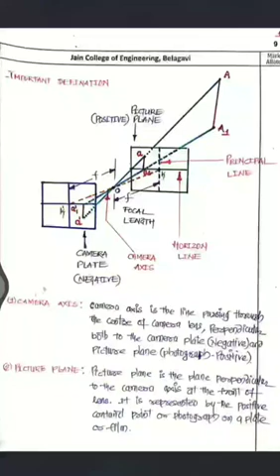Welcome friends. Today we are going to see some of the important definitions about terrestrial photogrammetry, and then we are going to derive a few of the equations regarding photogrammetry, especially terrestrial photogrammetry.

Now before going further, I would like to brief you that we have started module 4, that is aerial photogrammetry. Before going to the problems of aerial photogrammetry, you should understand terrestrial photogrammetry and the basics of photogrammetry. So today we are going to see the basics of photogrammetry, and in the coming classes we will go for aerial photogrammetry.

Now a few of the definitions. You can see this figure. By understanding this figure you can easily get the definitions. The first definition is camera axis. In this figure we have two planes, or two plates you can call them. One we call the negative.

You all know how we get photographs. Previously we used negative films to develop the original pictures. You are well aware of the camera company Kodak; you used to put the reel there, take negatives, then develop those negatives into the original photographs or pictures. The same concept is here.

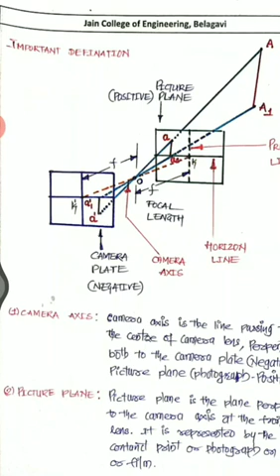Now with these two planes, there are a few things I want to clear. First, here you have what we call the principal plane. Now this principal plane: take the fiducial points. In the last class, in the last problem, we all saw what a fiducial point is.

If you have reference points on the photograph like this, and you join these fiducial points, we call them principal lines. This dotted line here is a principal line, and this is also a principal line. The plane where these lines lie we call the principal plane. Here also you have these two principal lines.

Now this junction, the center point K here, is very important. From this point K, the corresponding point is K dash here, and the distance from K to O. The point where these imaginary lines, or photographic rays, coincide is the center point. You can call it the perspective center.

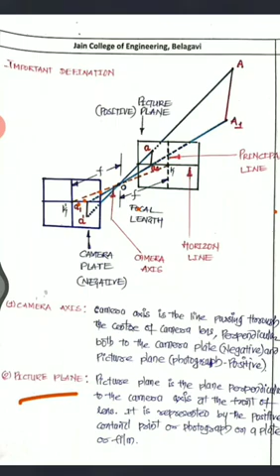Now here, principal point: as I said, k and k dash lie at the center of principal lines. Where the principal lines cross, the crossing point will be your principal point, as I have shown in the figure. The principal point k and k dash is defined by the intersection of camera axis with either the picture plane, that we call positive, or the camera plate, that we call negative.

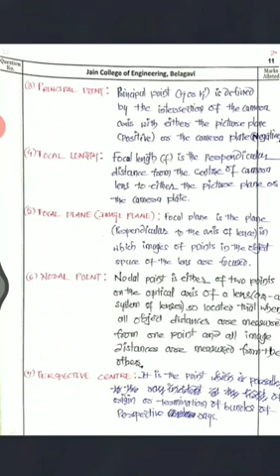Focal length, that is the distance from O to k dash. Focal length is the perpendicular distance from center of camera lens to either picture plane or the camera plate. I'll show that. Now here, these points are k and k dash, principal points. Then you'll be having the focal length. See this, from O to here, this distance will be your focal length.

Then focal plane, or you can call it image plane. Focal plane is the plane perpendicular to the axis of lens in which images of points in the object space of the lens are focused. Then nodal point. Nodal point is either of 2 points on the optical axis of a lens or a system of lenses so located that all object distances are measured from one point and all image distances are measured from the other. Then the perspective center: it is the point of origin or termination of bundles of perspective rays. That O point, as I said, is the perspective center.

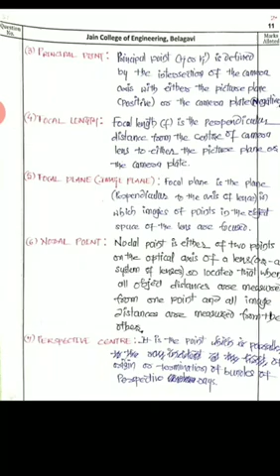Principal distance: when the contact prints from the original negatives are enlarged or reduced before their use in the compilation of subsequent maps, the value of focal length f of the camera is not applicable to the revised prints. The changed value of the same geometrical relations is known as the principal distance.

Principal plane: the principal plane is the plane which contains principal lines and the optical axis. Where the optical axis and the principal line lie, that we call the principal plane. Therefore, it is perpendicular to the picture plane and the camera axis. Principal plane will always be perpendicular to the picture plane and the camera axis.

Then the 10th definition is about print. A print is the photographic copy made by projection or contact printing from a photographic negative or from a transparent drawing, as a blueprint. That we call a print. Then fiducial marks; in the previous class also I told you about the fiducial marks. We call them reference points for photogrammetry.

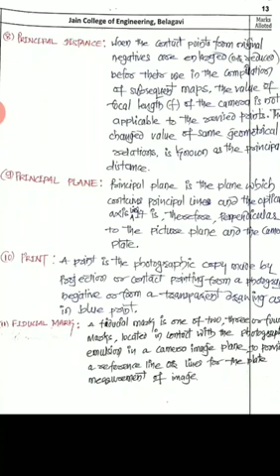A fiducial mark is one of 2, 3 or 4 marks located in contact with the photographic emulsion in a camera image plane to provide a reference line or lines for the plate measurement of images. I'll show that. Now here, if you take these points as reference points, then we call them fiducial points. These are the fiducial points. You got this? Fiducial marks.

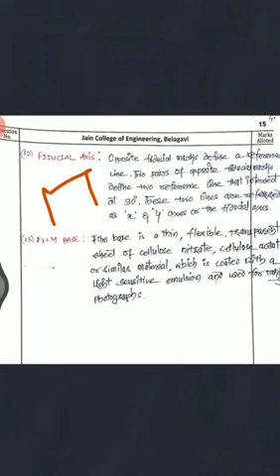Now the 12th definition is fiducial axis. We know what a fiducial point is. If you take a camera plane or photographic plane, mark the reference points on it, and join those reference points, we call that the fiducial axis. The line joining the fiducial points is the fiducial axis. Opposite fiducial marks define a reference line. Two pairs of opposite fiducial marks define two reference lines that intersect at 90 degrees. These two lines are referred to as x and y axis or fiducial axis.

Now here see, these are the fiducial marks, and if you join these fiducial marks, you will be having the fiducial axis, or you can call it x and y axis. Those axes are very important. As we go further, we are going to use those axes in the calculation, so that we can easily simplify distance measuring on the photograph.

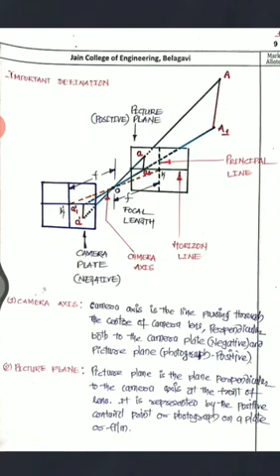And then the last definition is film base. Film base is a thin, flexible, transparent sheet of cellulose nitrate, cellulose acetate, or a similar material, which is coated with a light sensitive emulsion and used for taking photographs.

Now by using those definitions, we are going to derive a few derivations. The first derivation is horizontal and vertical angles from the terrestrial photograph. Now you are going to locate the image. See, this is point A and this is point B. You are supposed to locate these 2 points on the photograph, and you are supposed to measure the horizontal and vertical angles of these points from the perspective center.

2 points A and B are photographed with the camera axis horizontal, so that the picture plane is vertical and the horizon line is horizontal. The images of ground points A and B appear at small a and small b respectively, and their projections on the horizon line at A dash and B dash.

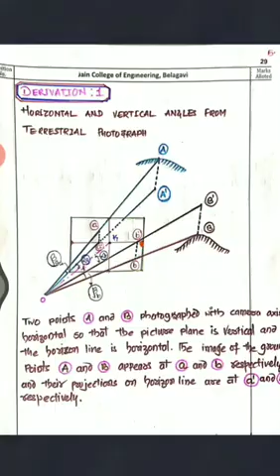Now you can see this A and B. This A is going to be small a, this point, and this B is going to be small b here, right? Similarly, their projection on the horizon line is A dash, and on the horizon line it is B dash, right? Just to clarify, this is the projection of A as A dash, and this is B as B dash.

Then you will be having the vertical and horizontal angles. Alpha A and alpha B are the horizontal angles with respect to the camera axis. See, O K is the camera axis, right? And the distance between O and K, I have shown as focal length f, and beta A and beta B are the vertical angles. 2 vertical angles and 2 horizontal angles.

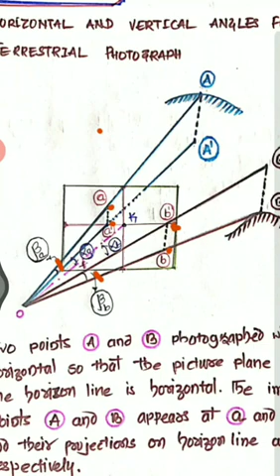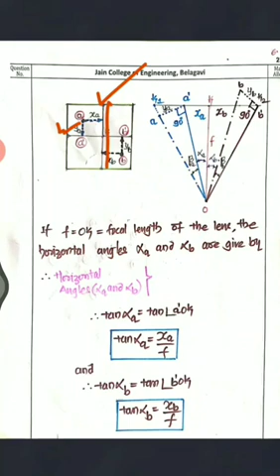Now the same projections I have shown here. From A to A dash you can call it XA, that is with respect to the principal line, and A dash, that is YA, right? Sorry, I said it in reverse. So from the principal line, the distance of A is XA, and from the horizon line, this distance is YA.

Similarly, with respect to B also, the distance of B with respect to this line is XB, and the distance between B and B dash, or between B and the horizon line, we call YB. Here I have shown YB. The same projection you can lay in this direction, so that you can easily analyze the things, right?

This is the central plane here. Then this is point K, and this is O. This is f, the distance between O and K. Then you can see this is A, this is B, and here you will have A dash and B dash. This is K1, this is K2, and this is K. So we are going to derive the equations by using these two figures.

If small f, that is OK, is the focal length of the lens, the horizontal angles alpha A and alpha B are given as follows. Tan alpha A is equal to tan of angle A dash O K. Now I will show you, this is A dash, O and K. So this is the angle they are going to consider, A dash O K.

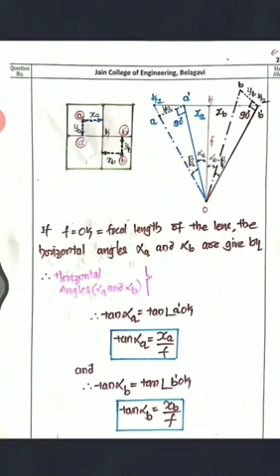Here you can see that AA dash is equal to YA, and the line A dash O is F sec alpha A. Similarly, BB dash is YB, and OB dash is going to be F sec alpha B. As AA dash is YA and OA dash is F sec alpha A, tan beta A is equal to YA divided by F sec alpha A.

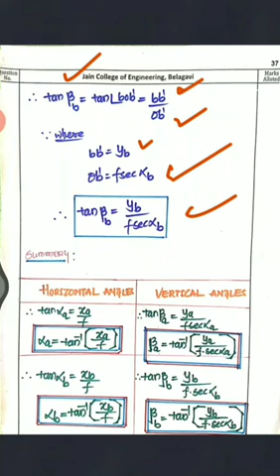Similarly, tan beta B is equal to BB dash divided by OB dash. BB dash is YB and OB dash is F sec alpha B, so tan beta B is equal to YB divided by F sec alpha B. I have summarized all of this here. Horizontal angle: tan alpha A is equal to XA by F, that is alpha A is equal to tan inverse of XA by F. Tan alpha B is equal to XB by F.

That is alpha B is equal to tan inverse of XB by F. Similarly, for vertical angles, tan beta A is equal to YA divided by F sec alpha A, that is beta A is equal to tan inverse of YA divided by F sec alpha A. Similarly, beta B is equal to tan inverse of YB divided by F sec alpha B. This is the first derivation. You have to remember these important formulas.

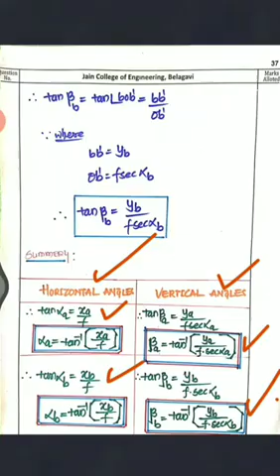One more important thing we are going to discuss is the azimuth. The camera azimuth and the object's azimuth are very important. Before that, consider the camera position by resection. To fix the position of the camera station, ground control is necessary. However, the camera station can also be located by 3-point resection if the positions of three prominent points, which may be photographic triangulation stations, are known and they are also photographed.

If you use the theodolite, you can take the bearings of PA along the line of object A, and bearings along lines B and C, and record those. The same concept as solving with the theodolite applies here. So you collect the bearings, and you have the angles alpha A and alpha B.

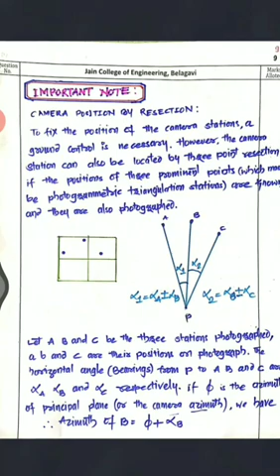Say you are going to determine the azimuth of B. When the camera azimuth is known, you can easily determine the azimuth of point B, right? So the azimuth of B is equal to the azimuth of the camera plus the bearing along B, that is alpha B. Similarly, azimuth of C is also there. Here you can see that the azimuth of C is equal to the camera azimuth plus alpha C.

Then the azimuth of A is equal to the camera azimuth minus alpha A plus 360 degrees. Now it is going to change depending on the location of A, right? In general, the azimuth of a line is equal to the camera azimuth plus the bearing, that is alpha, right?

Then a small note you should understand: if the camera azimuth is required to be determined, and you know the azimuth of that particular line or object and the bearing of that line, then you can easily determine the camera azimuth. Camera azimuth is equal to azimuth of line minus bearing.

Now we are going to get the elevation of a point. This is the second derivation, where you are supposed to determine the elevation of a point by photographic measurement. We all know how to get the elevation of a point by using the theodolite, right? If this is the ground and this is the object, and you have kept a tripod here and take the bearing, you can easily determine the height of the object by using a theodolite, or any kind of level, or a total station, right?

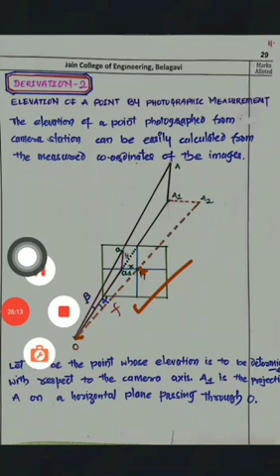Let A be the point whose elevation is to be determined with respect to the camera axis. A1 is the projection of A on a horizontal plane passing through O, right? A1 is A's projection. Now you can see how it is going to be by using X and Y. You can use these coordinates to determine the vertical angle.

So first we'll see the horizontal angle alpha. We can use this X and Y to determine the vertical and horizontal angles. First we derive the horizontal angle alpha, that is, tan alpha is equal to X divided by F. This is very easy. You can see this figure, the enlarged figure of the previous one. Here the distance between K and A1 is X, and the distance between O and K is F.

Now by using this figure, the distance between A1 and K is X, and the distance between O and K is F, so you can use that. This is a 90-degree angle here, and here you have the angle alpha, so tan alpha is equal to X divided by F.

Now the vertical angle beta is given by Y over OA1, right? I'll show you. Here, this angle beta is equal to Y divided by OA1, this distance, right? So that is what you are going to determine.

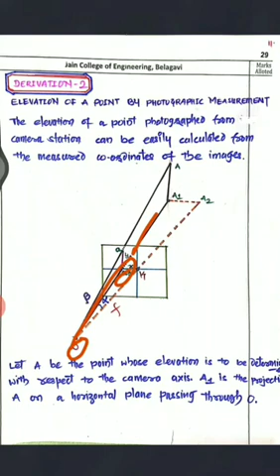Now here, OA1 is F sec alpha, right? So tan beta is equal to Y divided by F sec alpha. Now you can write that as Y by F into cos alpha, or else, see here, you can write OA1 is equal to square root of F square plus X square, that is F sec alpha. You can write tan beta is equal to Y divided by square root of F square plus X square.

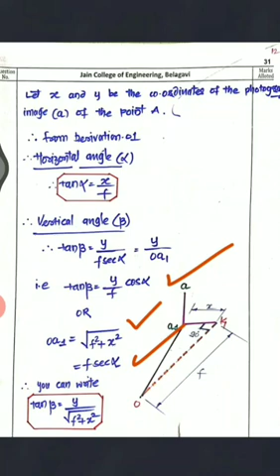Now where did this square root of F square plus X square come from? See here, this is a 90-degree angle, right? So you can easily find OA1 by using Pythagoras theorem. That is square root of F square plus X square. And by using trigonometric functions you can find OA1, that is F sec alpha. Altogether, tan beta is equal to Y divided by F sec alpha. I can write that term like this: tan beta is equal to Y divided by square root of F square plus X square.

Now if you see this figure, say this is A, I want to determine it from A dash on the ground. Then you will have the camera axis or instrument axis there. This is the instrument axis. Now this is the height of an object above the instrument axis. If this is the camera station, the image is generated on a negative in reverse, A here and A dash at the top. This we call Y, right?

And the distance OA1 is going to be square root of F square plus X square, right? Now, by using this figure I'll determine the height. From triangle A-O-A, this triangle is similar to triangle OAA1. Both are similar triangles.

By the properties of similar triangles, y divided by OA1 equals AA1 divided by OA1. We have termed AA1 as V here, so that is V divided by OA1, where V is equal to AA1. We know that this OA1 is square root of f square plus x square, and here, this is O and this is A1, this is D, so OA1 is equal to D. That I have written there.

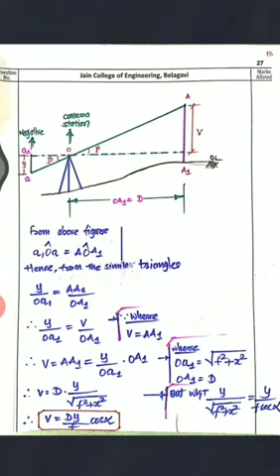As I said, if you know the instrument axis or camera axis, this camera axis plus V will give you the RL of this point, plus you have to add some corrections. I'll show you the relation between V and camera axis. If the elevation of the camera axis, that is instrument axis, is known, the elevation of the point, the RL of the top, can be determined. So H is the RL of top of object, which equals HC, the elevation of camera lens, plus V, the elevation of the point above the lens, plus C, the correction for curvature and refraction.

So I have written that H is the elevation of point or RL of top of object, HC is elevation of camera lens or instrument axis, V is the height of object above the instrument axis, and C is the correction. So in general, RL of top of object H is equal to RL of instrument axis HC plus height of object V plus corrections. This is the formula to get the RL of top of object. This formula you have to remember.

Now this is the second derivation. Remember, in derivation 1 we determined horizontal and vertical angles. In derivation 2 we have the vertical height. Using these two derivations, I am going to do one more general derivation for focal length in the next class, and then we'll solve a few problems on all three derivations.